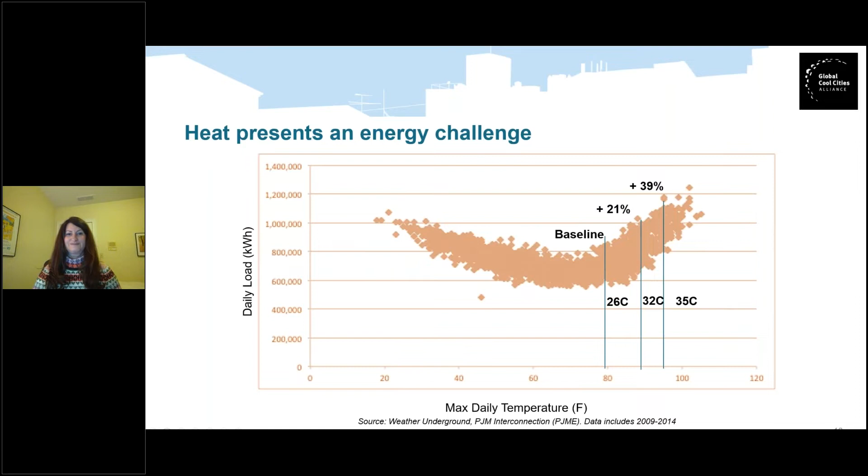So this slide is really important because I think it highlights the need to layer on the cooling effects that are the purpose of today's webinar, how we see built environment and urban environment, and the effects of doing all of them in a combined way are not just additive, they're amplified. So that is really important in how we address cooling, because we want to consider all surfaces, including the building and the sustainable cooling strategies that Andreas is going to speak about today. Next slide.

So this is the gist of cool surfaces. We typically think of cool surfaces as green, and they cool through evapotranspiration, or cool, which is lighter in color or higher reflectivity. So it's important to note this image shows a comparison of a dark roof and a light roof. What we're seeing is that the colors aren't necessarily indicative of the cooling effect, because we can increase the reflectivity through the formulation of the materials. So particularly when we get to the pavement sections, I'll make note of this.

But the greening, as you see on the roof, is you're able to cool the environment by having those plants that cool through evapotranspiration. And then other surfaces include permeable and porous. There's also blue roofs, and those are specifically designed for stormwater retention, and they hold that water. And again, the cooling effects are experienced from the release of the water into the air. And then it drains over time. So a double effect of cooling as well as stormwater prevention and retention. Next slide.

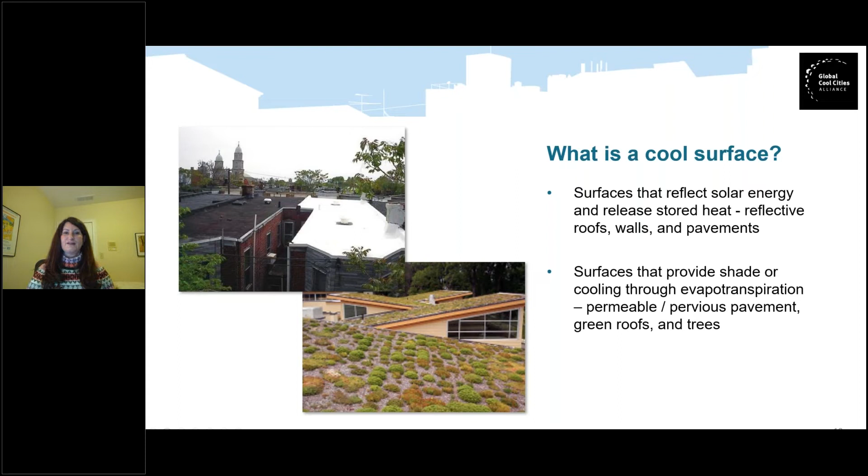So this is the detail then of how cool roofs work. If you compare the images on the left and the right, you see the black roofs, and you can see how much heat is emitted back to the atmosphere. And even comparatively to the white roof, you see a significant portion that goes into the building as heat. So therefore, it is definitely seen that the cool roofs reduce the heat load into the building. So that is a very important factor to remember.

Then of course on the dark roof, so much more temperature is reflected back into the cities. Then the next thing that you want to remember is the reflectivity is the most impactful variable in determining the coolness. So the new white roofs reflect 70 to 85% of the sunlight initially, and then 55 to 65% as it ages.

So you do still see an increase in reflectivity relative to dark roofs, even though it is lower as it ages. And when we consider aging, it is a 3-year look at the weathering that is designated in cool roofs. So in that case, we know that that is still 40 to 50% more than the dark roofs. Next slide.

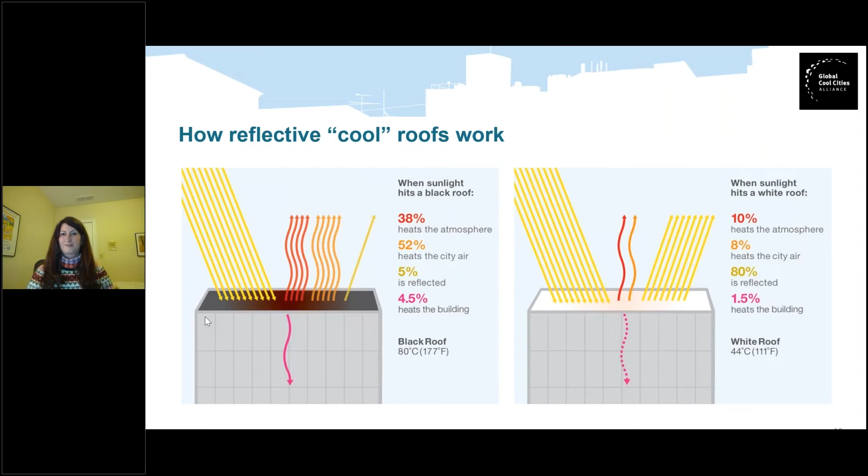So when we switch over to pavements, this is one of the reasons that in addition to our cooling in the roofs area, we are trying to emphasize the need to use pavements and dark surfaces on the ground as a key cooling strategy for fast change in urban warming. You know, the greening, the trees are well understood, green infrastructure, porous pavements are well understood, but there is a gap when it comes to pavements.

So you can see the top image that shows the difference in temperatures of the grass versus the pavement. So red is obviously hotter in that image. So this emphasizes that there is a huge opportunity to achieve scaled cooling by being able to address the pavements.

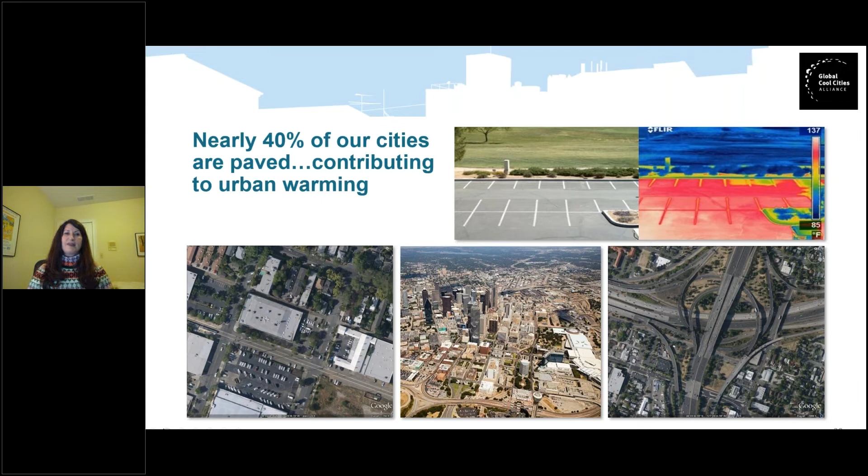So to this end, we are engaging the manufacturing sector because we need to know what's available. We need to be able to show the business case to these manufacturers and show that it's worth their investment to innovate and provide more materials. And we're doing this not just in the US, but also in cities around the world. Then, of course, an important part that is aligned with the Global Cool Cities Alliance mission is that we are able to support efforts to develop policies and programs that promote the use of cool pavements. Next slide, please.

So here's an image. On the left, you see a highly solar reflective coating. And again, it is an example of the reflectivity, that rather than holding the sun's energy, it is reflected into the surrounding area. And the important thing to note here, this image shows a much lighter color, but since this was taken, a couple of the large manufacturers are working on advancing innovation around darker pavements, because it could be seen negatively that there are tire marks and different stains that can come on a lighter color.

So the research now is trending towards the availability of a darker color that includes the same highly reflective formulation. So therefore you still get the same cooling effect. And that's important because, when you think about even this color that you see, it is along the lines of concrete. So there's not a glare, and there are still the same safety requirements of standard traffic.

And then to the right, the image shows the permeable or porous pavement. This is similar to a program that is being done in Paris, where on extreme hot days, they actually water the streets that are permeable porous pavements in order to achieve the cooling effect. So that's a very neat project that's going on there.

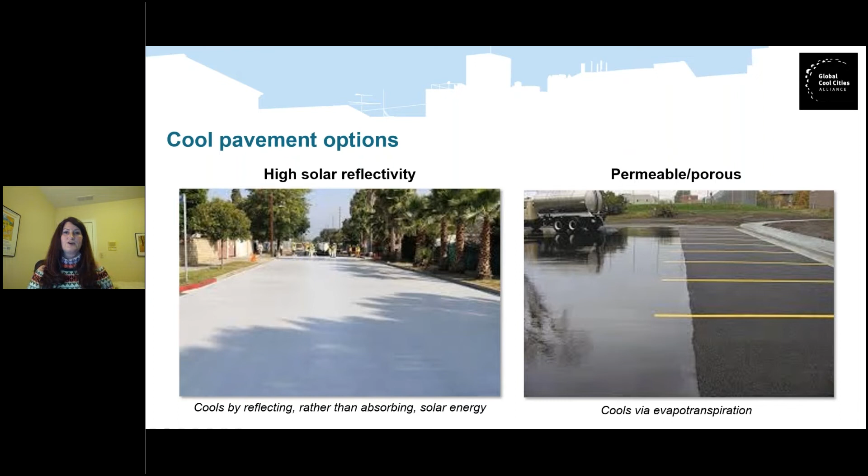So again, you get the evapotranspiration, and think about the significant surface area that can be achieved with this kind of cooling in a relatively rapid fashion compared to tree planting, which often takes at least 15 to 20 years to achieve a substantial crown canopy, to where you would actually see a cooling effect. Next slide, please.

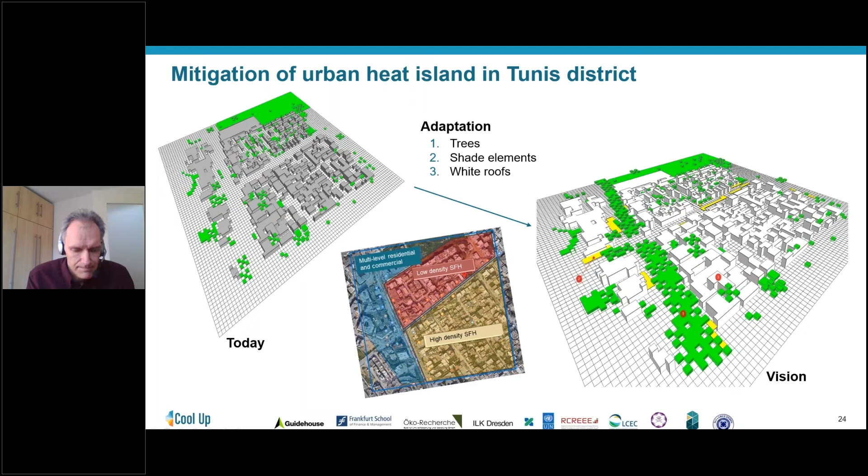So here we see the results of temperature change, but first let's focus on the left side. What you see here is the situation on the 22nd of July at 4 p.m. Please note the orientation. So left is actually west and the top is north. That's important because you also see the wind direction in the wind rose in the middle. And what we see in the left picture is the difference in air temperature between today's actual situation and the situation that we would have if we'd implement the measures that I just described. So planting trees, shading elements, and having white roofs.

In the temperature scale, you can see that blue means it's getting cooler. And you can see that across the area, and it is a relatively small area, as you can see, it's just like 360 by 360 meters. Even in such a small area, these measures already create quite a significant impact overall, a cooling down of the air temperature of like 1 Kelvin or 1 degree Celsius, if you like.

So what you can also see is the impact of the wind, because it's blowing from the right, so to say, from southeast to northwest. And you can see when you interpret this picture on the left that the cooling measures that we implemented actually build up across the area, so that the further you go into the district, the stronger the effect gets. So this means if we would implement these measures in a larger district, you would even see more prominent impacts. So this means more cooling down than what we see on this really small area here.

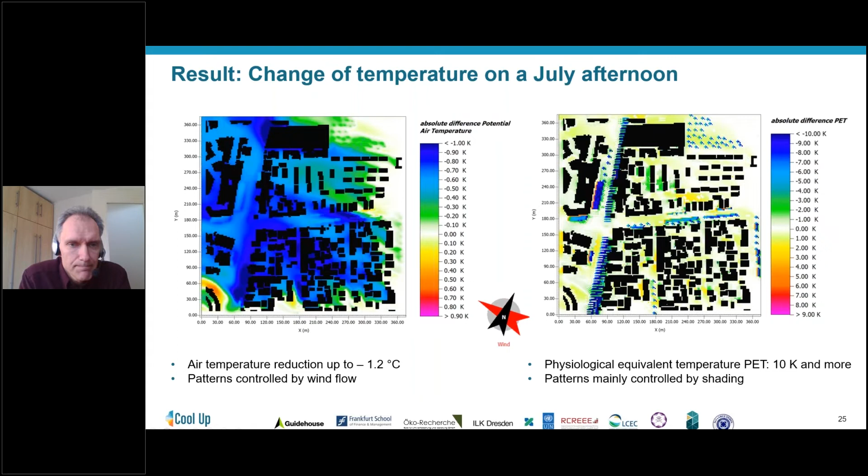So now the question, of course, is how this links to the concrete energy consumption for cooling in buildings. Next slide, please. So what we did exactly for this 360 by 360 area that I just explained for the urban level is we picked 15 typical buildings across the whole district, and we calculated, again with a dynamic thermal building simulation, how much useful cooling demand you would actually reduce by applying these few measures in the district I just showed you.

So the savings amount to 3 to 5%. And at first sight, you may think, oh, that's not too much. I would have guessed this might be more, but as I just pointed out, first, this is a very small area. If we would apply more, we would get more cooling of the surrounding of the buildings, so of course we would then also get more savings here. And what we see in the picture here is not the electricity consumption of the air conditioning unit, but it's really the heat that you remove from the room, so from the building you live in or work in. And this is just the first step, of course, but then the next step of the chain is the efficiency of the actual cooling unit.

And when you think about where these units are typically located, so on the street or typically on the roof, you can imagine that when going to the next level of calculating the electricity savings, we would see again significantly higher savings, because as we have implemented cool roofs here, the cooling units would be located within a much colder area, and the colder in summer the area is where you have your outdoor units of the air conditioning, the more efficient they can operate. So that would be an effect that comes on top.

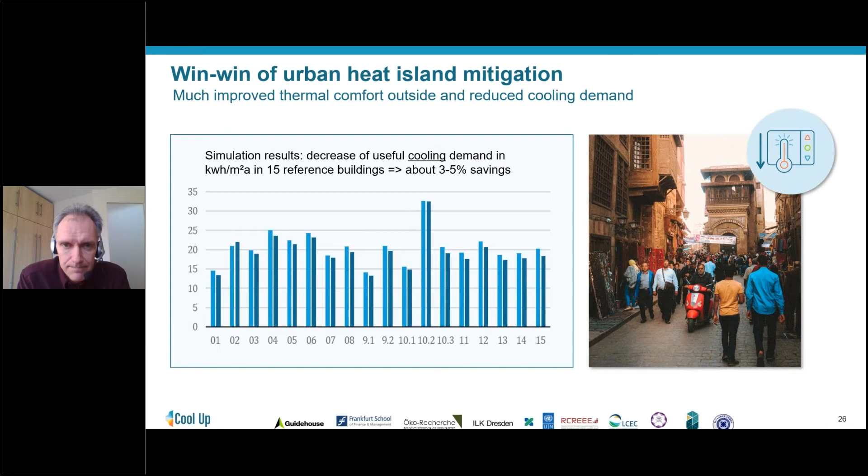So this was the link between the urban and the building level. And of course, we can also think about more measures to achieve sustainable cooling, meaning getting down with cooling demand, with electricity use and greenhouse gas emissions, and also increasing the well-being of people working and living in the buildings. So the first thing, which I think shouldn't be forgotten, is what we call holistic planning. And this means that you should design very early for sustainable cooling. In new buildings, this means compact design, the orientation of the building, and the sizes of the windows.

That's something you can do specifically in new buildings, of course, and in existing buildings also by changing windows. For example, you can still decide about the solar gain coefficient of the windows by orientation. That's also something you can do in the planning stage already, which moves us to the passive measures, meaning that you do not actively use energy to improve the comfort, but you really use passive measures, which partially also have zero to low upfront cost.

And the impact of these passive measures is that they keep out heat and irradiation, and by this they support natural cooling, natural ventilation, for example. So concrete measures which are extremely effective are solar protection, specifically external solar protection. Then again, we have the white roofs, which not just on the urban level have a very significant impact on the outdoor well-being, but of course also on the indoor well-being and the energy efficiency and the energy consumption for cooling. Adequate insulation of roof, walls, and glazing, of course, also helps to keep out the heat.

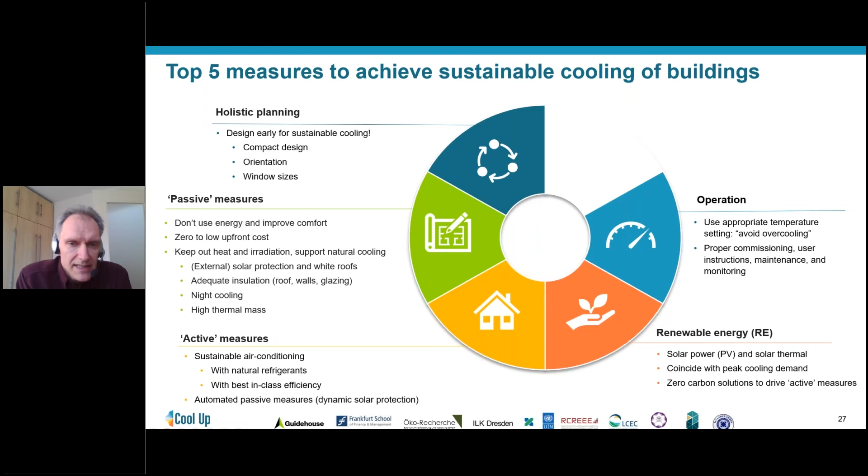So the question now is, what is the impact of all these passive and active measures I just presented? This is a qualitative slide that shows you the different steps that lead us from the status quo of today to a future situation that we would like to support with our Cool Up project. The status quo, that's very important. It shows you two aspects of global warming. It's the so-called total equivalent warming impact, and this is put together from indirect CO2 emissions.

So just take your electric-driven AC unit. It is the CO2 emissions that are generated by the electricity generation, so the power plants that generate the electricity. But you have also direct CO2 emissions from leakages of the AC units, which come from artificial refrigerants disappearing into the atmosphere, and they are causing very significant global warming.

You can see in comparison to the indirect CO2 emissions, this share can be extremely high, up to 50-50. And the efficiency improvement that we can imagine in the next step is applying an improved air conditioning unit with higher efficiency, using less electricity, which means causing less indirect CO2 emissions.

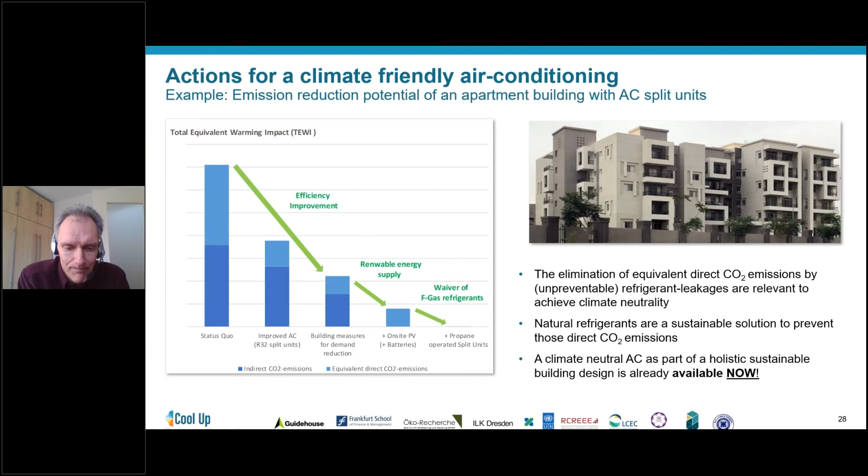So here I would like to finalize the presentation with providing you 3 examples, going from high-tech to low-tech, so to say. Here we have the high-tech example. It is the IRENA headquarters, the International Renewable Energy Agency in Abu Dhabi in the United Arab Emirates. The architect Woods Bagot, the concrete location is Masdar City. It was built in 2015, 7 floors, 32K square meters of floor area, so quite a big unit that we see here on the picture.

And you can see the priority in this building has been on applying the passive design strategies to reduce the cooling demand, and compared to similar buildings in this area, the designers achieved a larger than 50% reduction compared to a business as usual comparable building. They achieved this by applying some of the measures out of the set I already presented to you, but here you can see the practical application.

The building has a very well insulated building envelope. It has permanent shading elements. You can see that even the solar panels on top of the roof have been used as shading elements. On the facade, you see also, zooming in maybe after this webinar, some of the fixed shading elements. In the middle glazed part between these 2 horizontal structured blocks, you see a vertically structured block which has vertical shading elements, so vertically oriented, running from the top down to the bottom.

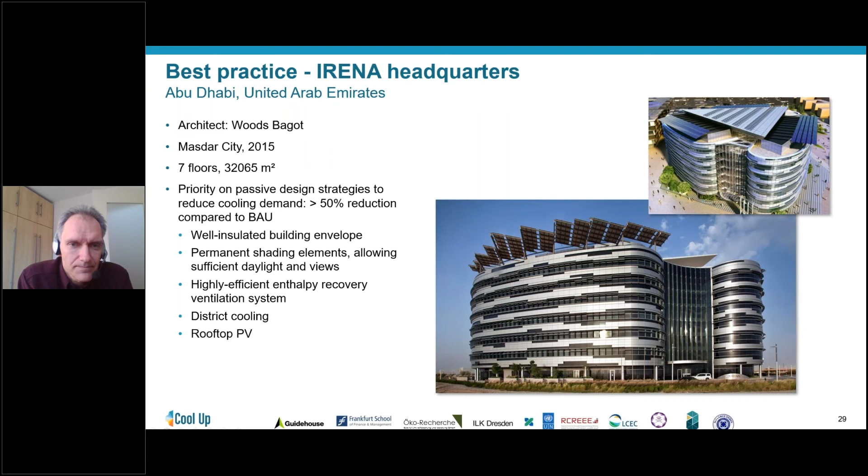The next slide shows a picture which is a project that we have also supervised a few years ago. It is located in Jordan. It's called the Aqaba Residence Energy Efficiency, and architect Florentine Visser. It was constructed in 2007, 3 floors, building 420 square meters. And what we see is, again, a series of passive measures: compact thermal mass, orientation of the building, thermal wall for heat accumulation, fixed shading elements, and it has a very innovative adsorption cooling system, even also applying energy efficient lighting and appliances.

The primary energy consumption is less than 20%, so it's not 20% less, but it's less than 20% of a conventional new building in Jordan. And for the payback, we achieved for this pilot already like 12 years. And if you imagine scaling up what we did here, we assumed we could arrive at 4 years.